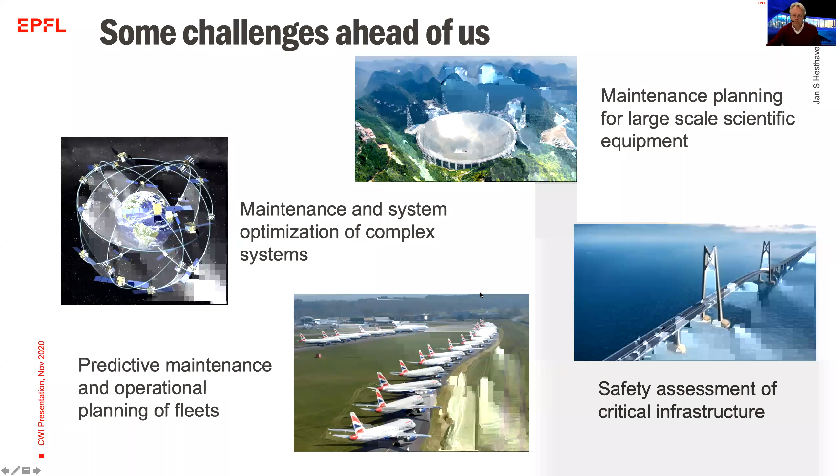So what is it that is common among these problems? What is common about these problems is that they're complex, they're multi-physics, they're multi-scale, and we cannot hope to model them directly. And even if you could model them directly, sort of ab initio, there will be a large amount of uncertainty associated with the problem, and it would be very difficult, if at all possible, to do directly. At the same time, we are going to need tools that allow us to make decisions, how to maintain, how to operate, how to optimize these machines.

And machine learning could be an idea of trying to do some of these things, but there are a number of challenges when you think about it as a machine learning exercise. Let's say you take a bridge. You want to understand whether to do maintenance on the bridge or not. You're going to have some data of the bridge, but you're not going to have a lot. It's going to be sparse either in space or time. There's going to be noise. Some of the sensors will fail. And for some assets, airplanes, for instance, or satellites, it may be very expensive or perhaps even impossible to get the data.

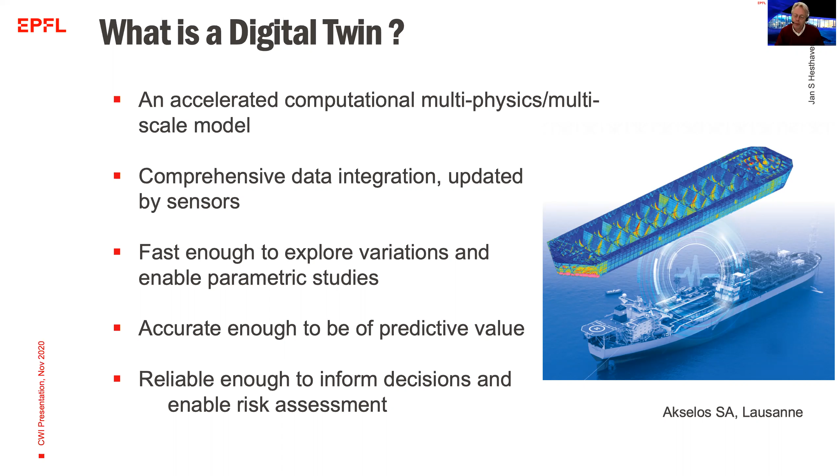But if you talk to all the big companies, the Siemens, the General Electrics, even Airbus, they all would like a digital twin, but the problem is so complicated that they don't know how to do it. They can do pieces of it, but putting the whole pipeline together is challenging.

So what is it that you need to do? Well, you need to be able to build models. You need to understand how to place sensors and integrate the data using the technology that you have. Now, once you have a model that is true to the data, you can use the model to generate data. And once you generate data, and lots of it, you can begin to use artificial intelligence to do decision support.

But because it's ultimately a small data problem, you have to go to the modeling phase. Otherwise, the AI tools simply will not have any chance of being successful. So in order to do all of this, there's significant advances needed, and we have done them in computational math, in modeling, and sensor technology, and so on. And this vision is sort of within reach.

And what I will show you today is rather than giving one talk in depth about a particular topic, I'll show you several elements of some of these issues, some of these developments that sort of point in the direction that we could hope to be able to do something like this in a not too distant future.

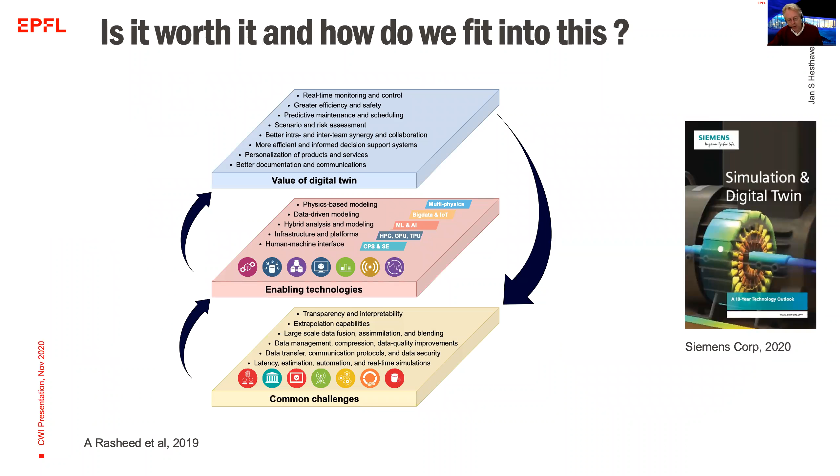So why would we do it? Well, I've already hinted at it. There was a nice figure down here in a review paper about a year ago, where the enabling technologies, that's what we all do, the computational modeling, physics-based modeling, data-driven modeling, all of this is sort of an enabling technology.

And if we can do it, then we can begin to build digital twins that can have value for risk assessment, predictive maintenance, scheduling, monitoring. There's a number of different activities that we would like to do for very complex systems. Okay, so the key is here, we're trying to do this for complex systems. And I'll show you some examples later on.

There was a report that came out from Siemens just a few months ago, all about digital twins. They have been talking about digital twins probably for 2 decades, and it's still not something that they're able to do on a big scale.

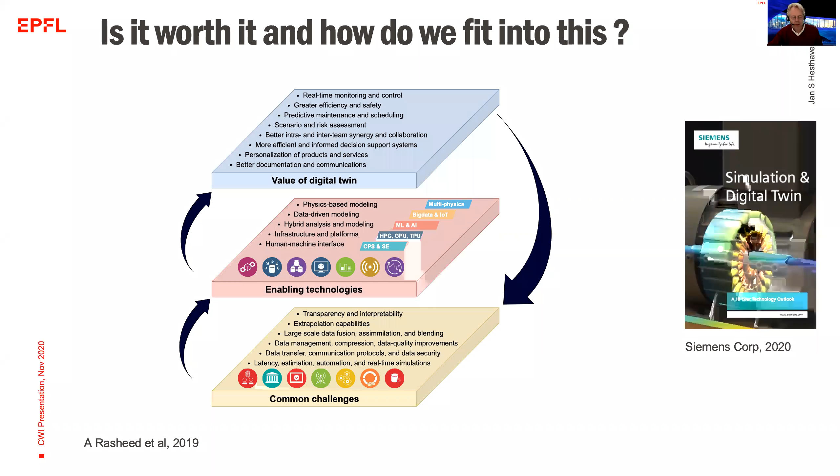Because only then can we begin to understand the dynamics of the problem, we can generate the data sets, and we can start using ideas of machine learning to make decisions. And then I will go into some examples. We'll see how far we make it. So, okay, reduced order modeling. So what's the idea of a reduced order model?

Well, what's the idea of a digital twin? We like to develop digital twins that are data informed. So in order to do that, we're going to have to have the ability to build the twin and sample it so that we can understand its behavior. It could be for uncertainty quantification. I'll show you an example for sensor placement, a number of different things, situations where we need to be able to solve the problem quickly. If every simulation is days of supercomputing time, then this becomes impossible.

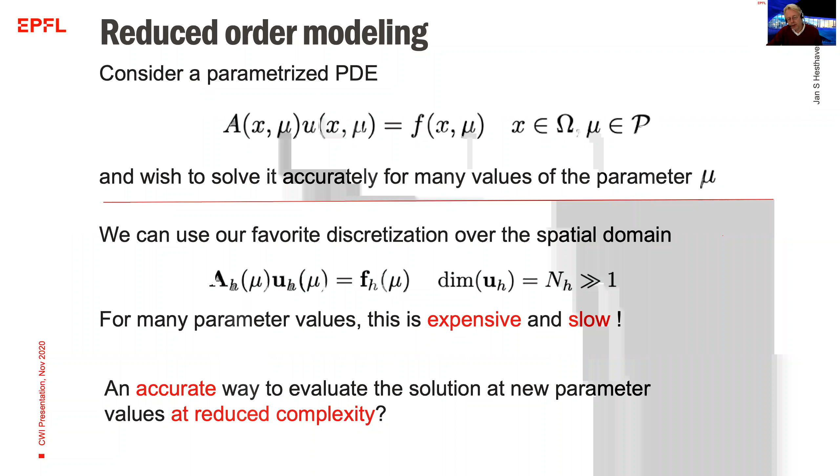Now, of course, you can use your favorite solver, finite difference, finite element, whatever you wish. If you want to do this accurately, then the number of degrees of freedom, n, is going to be very high, and therefore it's going to be slow, and you have to solve it every time you solve for a new parameter mu. So what we're looking for is an accurate way of trying to evaluate the solution at reduced complexity.

Now, let us assume, and this is an assumption that one can then check, that somehow there is another coordinate system. Instead of U, it's called Q. Q has many fewer degrees of freedom, and they're related through this matrix V, which is tall and skinny. So it has N_h rows, which is the number of degrees of freedom in the big problem, and N_r is the number of degrees of freedom in the reduced model. If N_r is much smaller than N_h, then you have a reduced model.

One way of thinking of it is I'm going to take a basis instead of my finite element basis. I'm going to choose a basis which is problem specific. If I'm willing to restrict myself like that, then in fact I can do a much better job within a certain class of problems. Now, you do a Galerkin projection, and we get a problem which, instead of being N_h by N_h, is now N_r by N_r. It's a dense problem, but it's very, very small. So instead of 10,000 by 10,000, it is now 10 by 10, which means you can now solve for every new parameter extremely fast. This is the idea of a reduced order model, basically finding a problem-specific basis.

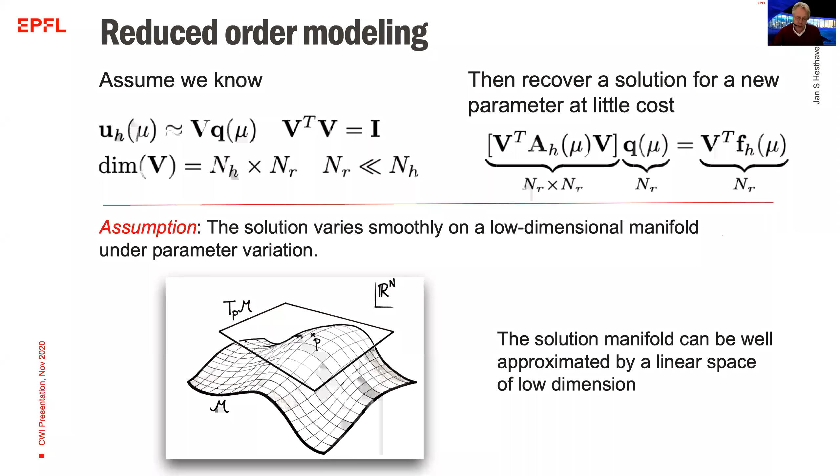Now, does this always work? Well, basically what you're assuming is that as you vary the parameter mu, the solution changes, but it changes in a smooth way, so that you can approximate the solution manifold. So this is what M is. As you change mu, the solution moves around. But you're basically making an assumption that at least in a certain region of the parameter mu, I can approximate this manifold very accurately with a linear space. Sometimes this is not, in fact, correct. But if it is, you have a good model. You can test whether this is accurate, and there are ways of dealing with that.

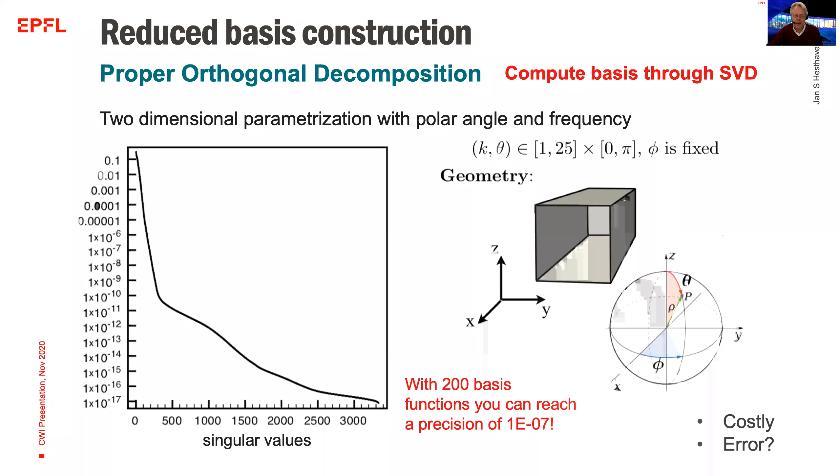Now, when does it work? Well, actually, there is an elaborate theory that allows you to certify these models so that you have a reduced order model that you can guarantee is as accurate as you need it to be compared to UH, which is the high resolution accurate solution. Okay, so we're not going to spend time on this.

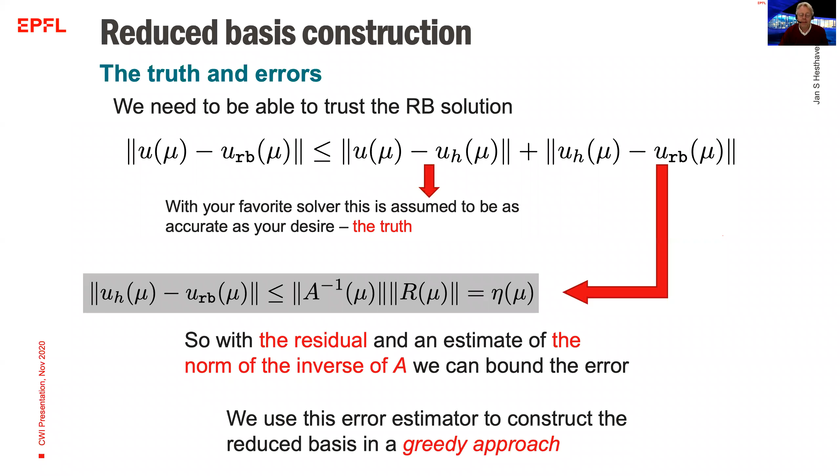It's just for you to know that there is an elaborate theory these days on how to do reduced order models for linear problems. Using this kind of technology, you have error estimates, everything is there. Okay, there's a book, you can download it for free. That's the only reason I bring it up there. That tells you and gives you an idea.

You can do it for electromagnetics, acoustics, elasticity. You can do it for Navier-Stokes, quadratic nonlinearities, and so forth. So there's a huge body of work there that allows you to solve complicated problems at very low cost. So let's see how we can use that. So the first example is I'd like to detect failures in a structure. Let's see if I can.

So the question is this: let's say I have a structure, a building, a bridge, whatever, and I'd like to know if it's failing or if it's about to fail. I don't know what type of failure it is. I cannot possibly characterize all possible failures for a bridge. So I cannot build a machine learning technology that can identify known types of failures,

because it's an impossible exercise. At the same time, the bridge has natural variations. The materials vary, they change over time, they decay maybe a little bit. Doesn't need to be a problem, but it nevertheless happens. So in a structure like that, how can you detect failures, say, using sensors? Okay, so the idea that I will present is the following.

So I'm going to build a model of the healthy structure, the one that I know. When it was built, to the best of my ability, I built a model of a healthy structure. Then I use that model to generate samples of sensor signals over natural variation. Say I allow the materials to vary, perhaps the geometries to vary, whatever. And every time I exercise my reduced order model, which I can do at low cost, I extract sensor signatures.

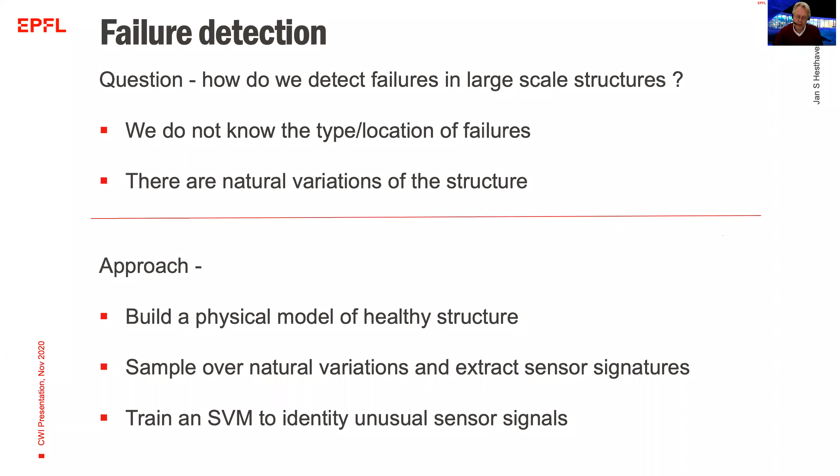And then I will use these sensor signatures with what is called a one-class SVM. I'll show it in a minute. That basically can detect outliers. Okay, so let's see how it works in a little more detail. So these are the structures that I will show. It can be more complicated ones. So it's a linear elasticity problem. You have waves that propagate around.

And the idea is I would like to put a source on the structure somewhere, as well as some sensors. And then by actively exciting the structure, I would want to know from the sensors whether something is wrong or not. I allow for uncertainty in the materials, so that the Young's modulus as well as the Poisson ratio nu can vary. But other than that, it's a linear problem.

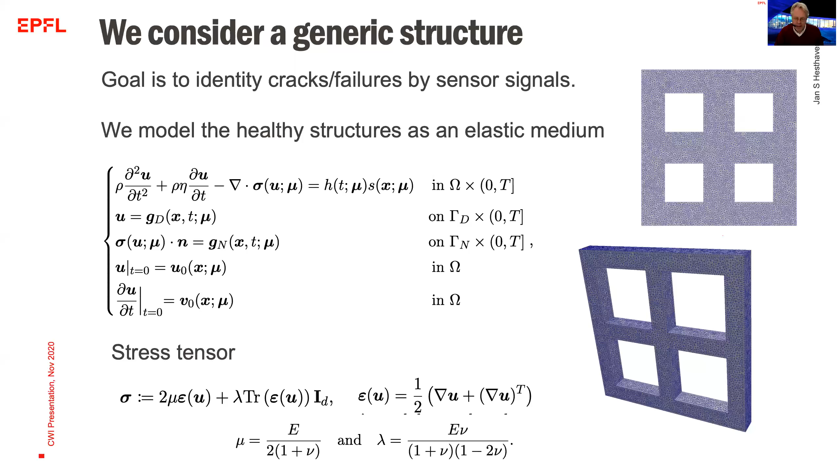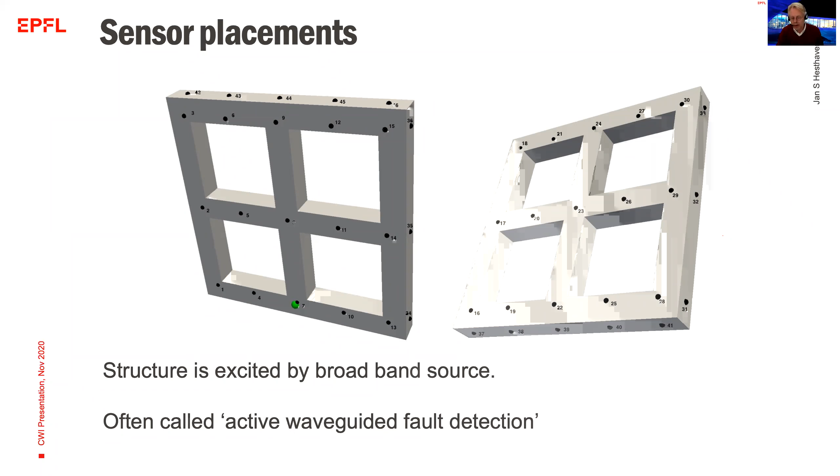So here are sensors placed on the 3D structure as an example. The structure is excited where the green dot is. It's a broadband source. Think of it as a hammer that hits it. Then you have sensors that record the signal. This is called active waveguiding. Because if you want to actually see failures far away from the source, you need to look at it as a wave problem. It cannot be a static problem. Then you can't see them.

So how does it work? Well, again, I assume the materials have natural variations. You sample over all these. This gives you a large data set that you have now created. You identify features in the time traces at the sensors that are failure sensitive. So let's say the arrival time of the first peak, the maximum amplitude of the signal, and so forth.

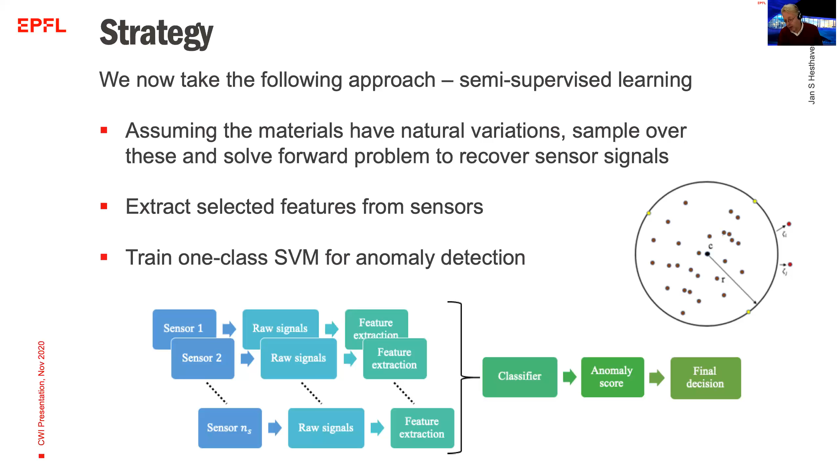And then you use that to train a one-class SVM. A one-class SVM is: you give it all the data and it tries to classify all of it as being healthy. So it creates a boundary for all the healthy data, and anything that is classified as outside of the boundary is called an outlier, and this can be scored depending on how far away you are. So you get an anomaly score, and then you can decide based on that.

Now, in fact, what we do is we do it in a two-stage process, where first we look at the signal from all the sensors. Now, if all the sensors are good, then obviously nothing is wrong. If some of the sensors are lighting up as something going on, then we would say we need to do a second stage, and then we would look at the local sensor signals.

So there are two SVMs. There's one which does the global analysis, and then there's one that does it at each sensor at a time. And with the second stage, we can then localize the failure.

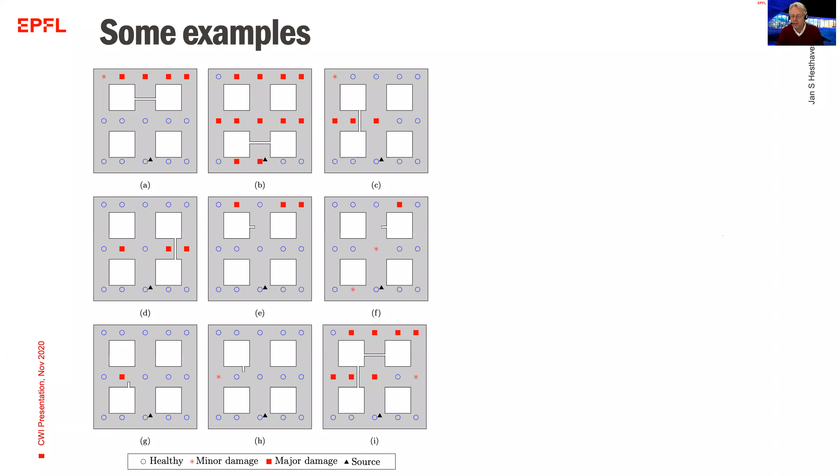Now, this is not an exact science, but it gives you a sense of where the failure could be and whether it's a large failure or a small failure. You do the same thing in 3D. Again, you have either broken beams or small cracks. And you can see that the ones that are red are the ones that light up, saying something is going on. You need to look at that part of the structure to see if there's something going on.

So this is an example of a combination where you do careful modeling using reduced order models with uncertainty quantification on top of it to build the data set that you then use to drive an SVM classifier that you then use to detect failures or not.

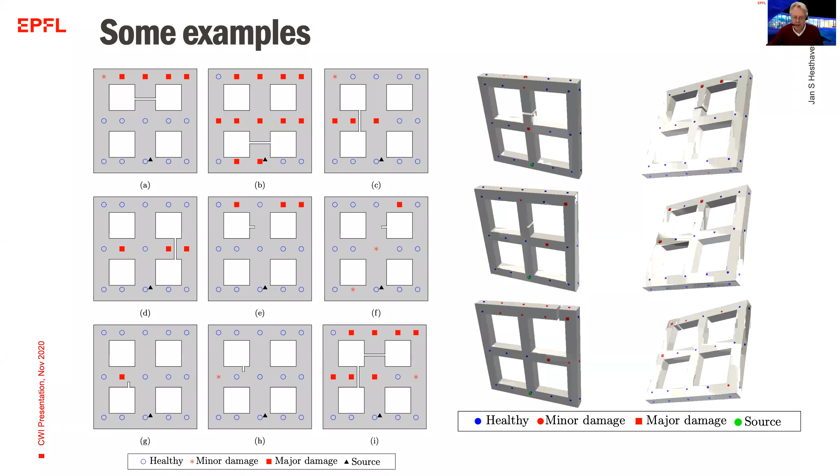Now, this was for a linear problem. If you want to do nonlinear problems, it gets more complicated. So as we just went through, here's the reduced order modeling again. You get the small problem on the right-hand side, everything is fine. But if it's a nonlinear problem, then the problem is that A, your operator, depends on the solution. So therefore, you would have to evaluate it every time. And then you lose the benefit of the whole method.

So you can play some games, there are various ways around that, but if A is a general operator, this becomes very complicated. So what I'm proposing here is actually to build a reduced order model using machine learning as a surrogate model. And then once you have the reduced order model, you can go and do the exercises that I just talked about using building data sets.

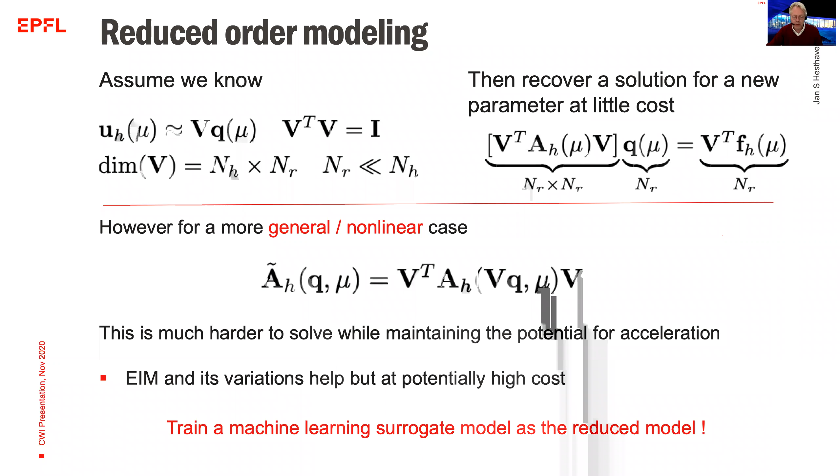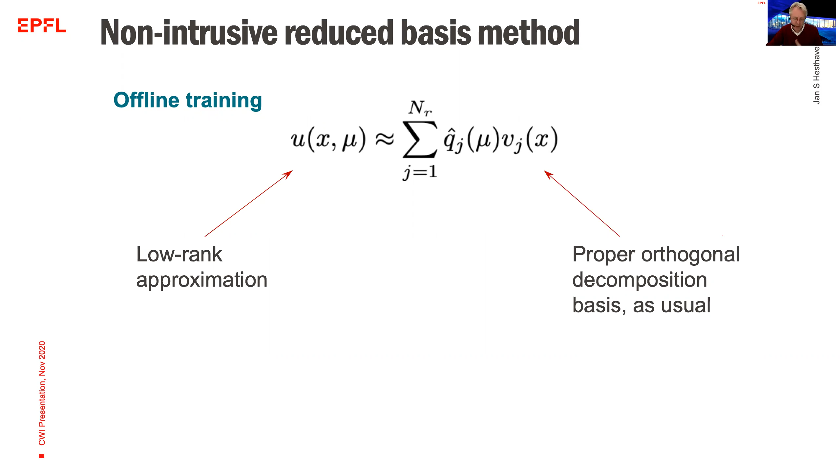So how does that work? Well, this means now that we will again represent our solution U as a function of two. There's a spatial variation and there's parameter variation. The spatial variation is exactly as before. This is the eigenvectors, what I call V. And instead of solving a small problem in order to find these Qs, I will train a machine learning process. In this case, we will use Gaussian process regression.

You can also use neural networks. We have done that. It also works. But the neural net is sort of the last stage. If nothing else works, you can do the neural net. The Gaussian process, if it works, is much faster and much simpler. And then once you're done, you have created a surrogate for the coefficients, and you never solve the problem again.

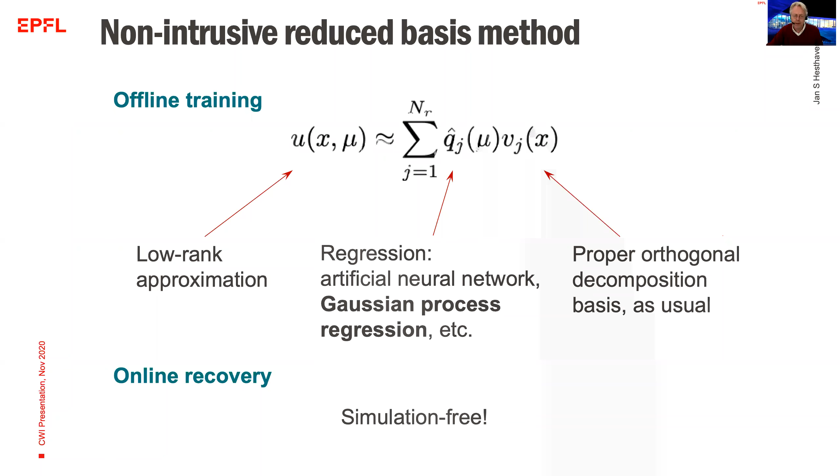So in this case, we use Gaussian process. It's not so important what that is. Think of it as you're trying to represent a function with kernels, so it's a little bit like radial basis function methods. Okay, so you don't have any grid or anything.

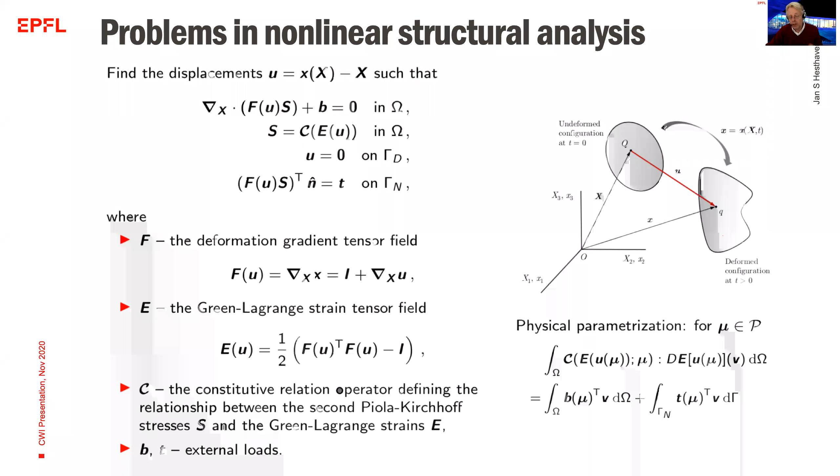So now we'll do nonlinear structures, but it'll still be structures. If you're not familiar with it, it's not so important. But it's a nonlinear problem. And this one is a classic problem that people have looked at, and this is called the Lee frame. So there are two parameters, mu1, mu2. And the material is a nonlinear material. And then what happens is you apply a force, F, to it.

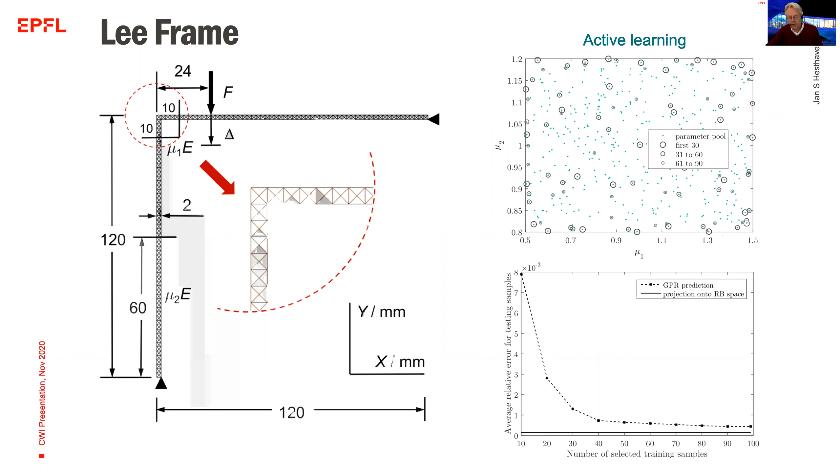And the frame on the upper left, as you push this Lee frame, it distorts in very serious ways, and then ultimately flips back. So this is actually a surprisingly difficult problem to do, but with this technique you can do it.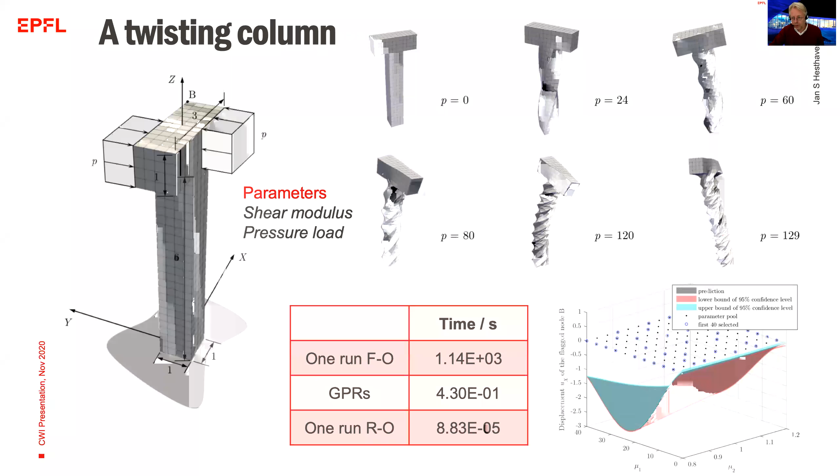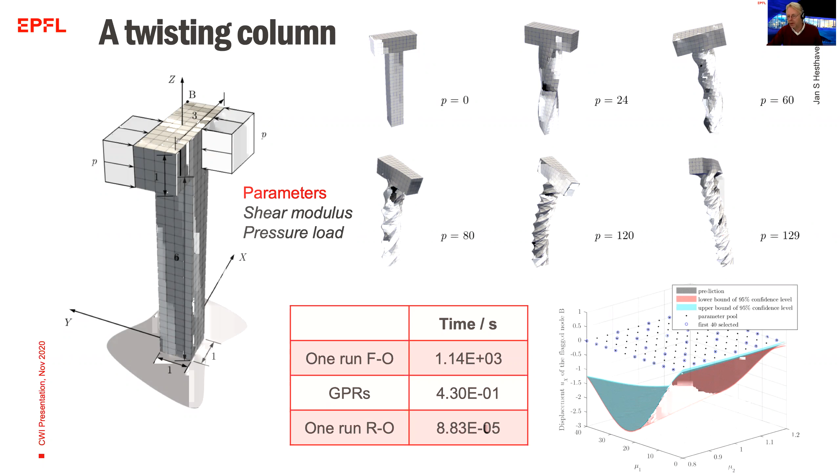So once you can do that, you can start doing nonlinear large structural problems, and then you can do uncertainty quantification and so on. All these things are only possible if you can solve the problem fast enough. If every time you have to sample, it takes basically 20 minutes to solve the problem for one parameter value, and you have 10,000 parameter values, there's just no hope. So it starts with the reduced model.

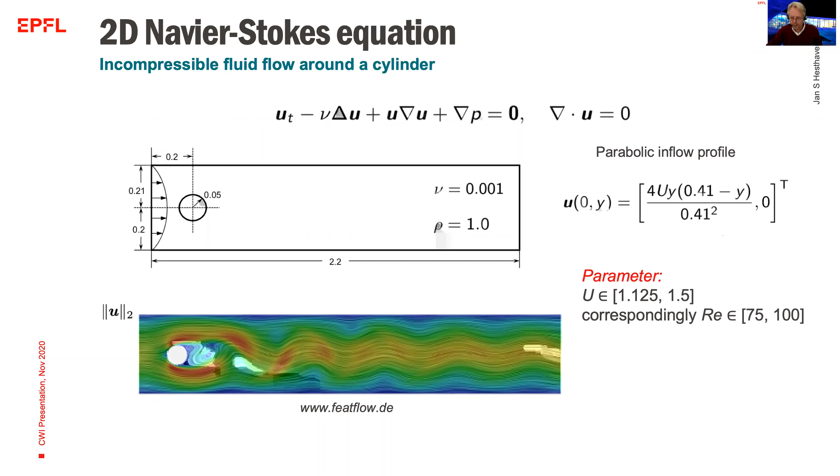You can also do fluid mechanics if you wish. So here, incompressible Navier-Stokes. It's exactly the same way. You build a model. Now you have time also as a parameter. The Reynolds number, of course, is relatively low, but you can see that you capture the shedding behind the cylinder very well, and at orders of magnitude higher speed.

Now, of course, you cannot take this model and say, oh, I changed my mind, I would like it to be a square instead of a round cylinder. Then you're going to have to start again. And this is how you gain the speed.

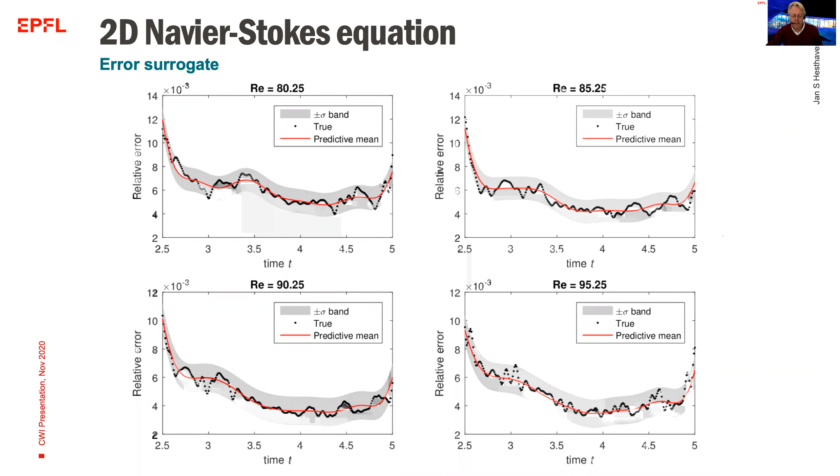Sensor placement. Maybe that'll be the last example. So here's the question. In fact, there are 2 questions. I have a structure, I'd like to put sensors on it. I only have a finite number of sensors because they all take energy. So I have a certain number of sensors I can put on, and I cannot afford more than that. So the question is, where should I put them? If I want to learn as much about the structure as I can, and I have 10 sensors, where should I put them?

Or the other question, which is equally interesting: let's imagine people have placed the sensors for me. 10 sensors have been placed. What can I actually hope to see? Very often you talk to people who have put sensors, let's say, on an oil rig, and the sensors are here, but they would like to know exactly what happens at the bottom of the sea. Now, is this even realistic? Is that possible? So these are complementary questions that are very, very much related.

So we need to make a couple of things here. We have to decide what it is that we want to measure. Now, it makes sense to measure something that suggests that there's a failure or not. We have already discussed arrival times, maximum height of the waves. We actually have 18 features that we look at.

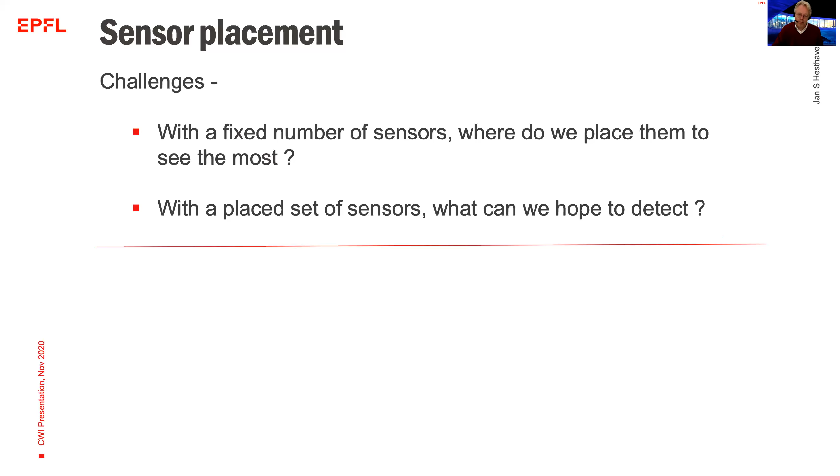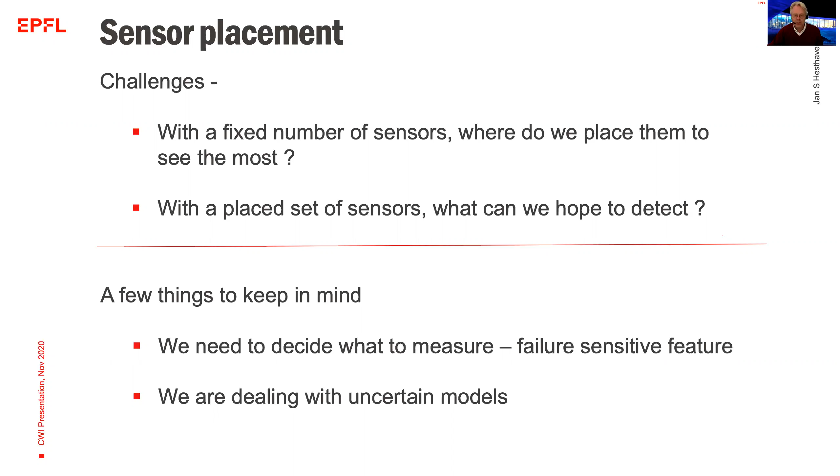And then at the same time, when we are placing sensors, we have to also accept that we're placing sensors in a scenario where there's uncertainty, there's natural uncertainty. So this is not going to be an exact science where these sensors should be placed, but rather taking into account the uncertainty. So again, we use, in this case, sparse Gaussian process, but it's a detail for now. Use a variant of Gaussian processes.

And then basically it's an iterative process where first you place the Gaussian, you pick the locations, you find the hyperparameters, you ask yourself, what is the maximum variance over your domain? You move the sensors to where that happens, and then you iterate like that. And then you do that for many, many different samples of the parameters in order to take into account the uncertainty. You only have to do it once for a structure, so it's not a big deal.

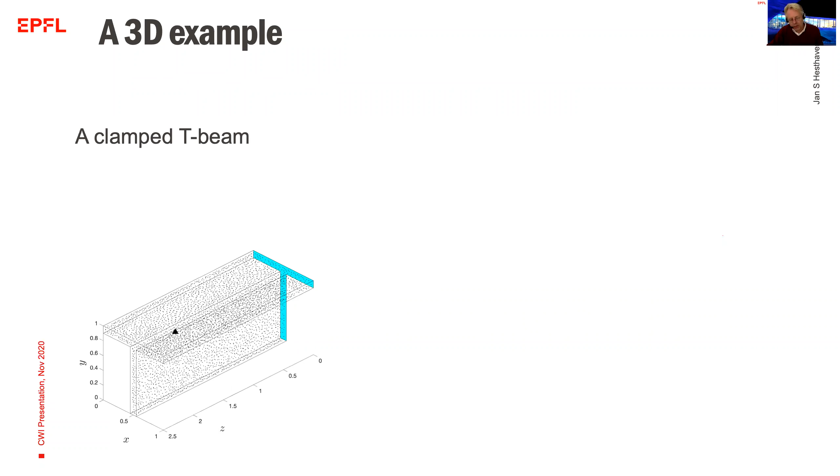Here's an example. It's a T-beam. It's clamped at the end. It's free at the left. And we want to know, as you impose a force on it, where should I put the sensors, knowing well that it's an uncertain material.

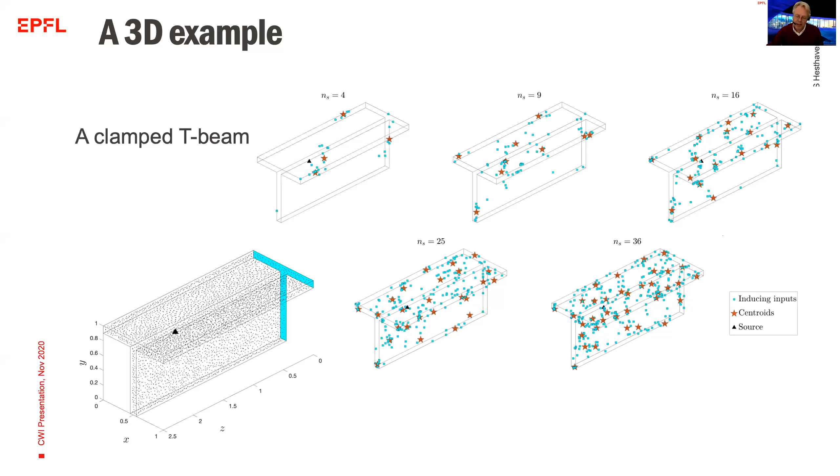So here's the result. So if you can only put 4 sensors, then these are the locations. And what you see is that the little blue dots is the result of the sensor placement varying while I take into account the uncertainty. And then for each of these clusters, you compute a mean. And this is the location. Okay, so this is 4 sensors, 9 sensors. It goes up to 36 sensors. And you can see that basically it takes into account the natural uncertainty by placing it in the mean of where the algorithm predicts.

And what this shows you is the variance reduction. So if you only have 4 sensors, it tells you that right where the sensors are, the colors are red, the error is relatively small. Well, no. So the blue means you have high variance, and the red means you have low variance. So this means where it's blue, you have a hard time measuring it with 4 sensors. But as you add more and more sensors, if you add them carefully, you can see that eventually you're reducing globally the variance in your prediction, which means with those 36 sensors, I can measure anything that goes on in my structure to within a certain accuracy.

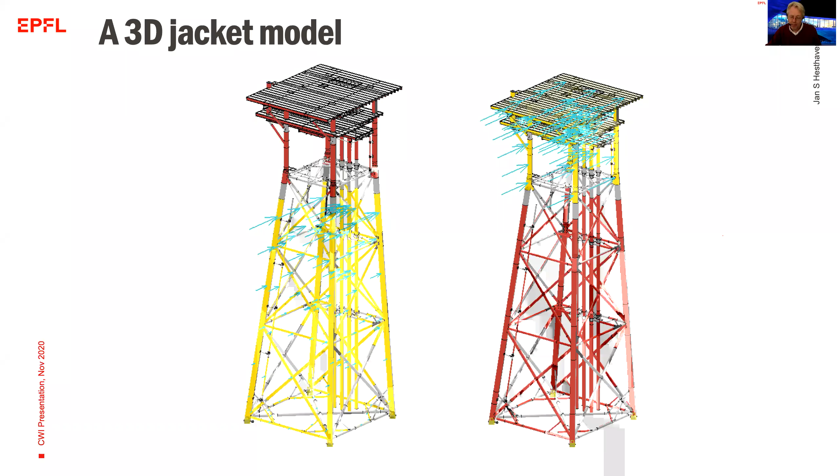That's the idea. Okay. Now, just to show you an example of a real structure, so this is called a jacket. So this is what sits underneath an oil rig. And there can be forces on it to the left. It is the forces from the ocean actually hitting the structure. The colors give you a sense of the forces on the structure. To the right is wind forcing. It is clamped at the bottom, and in fact, at the bottom, they can be nonlinear, but that's not so important. And if you go through this exercise and you ask yourself, well, if I want to predict behavior for this jacket, where should I put the sensors? And the algorithm says here.

And then the table on the right, the details are not so important, but these are basically 4 different cases of failures. You know, you break a beam or you do something to the structure. What is the chance that you detect it? And you can see that cases 1 to 4 get increasingly bad. So if a beam is broken, then all 10 sensors tell you there's something wrong. If it's just a minor thing, like in case 2, well, you still get 75 to 90% reliability over variations as long as you place the sensors correctly.

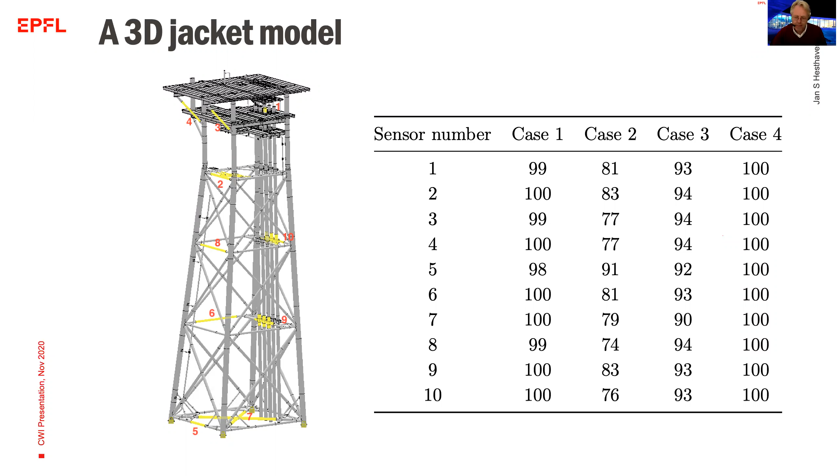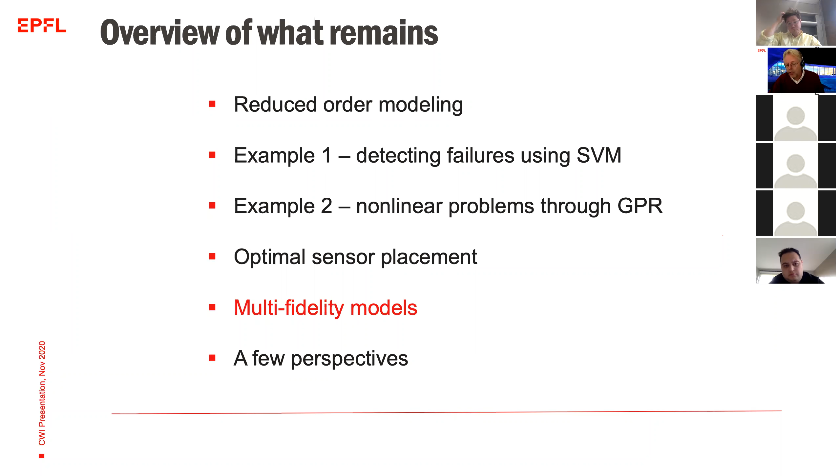So multi-fidelity, I'll skip this, but the idea is once you can place sensors, you have access to Mother Nature, and Mother Nature can give you the right solutions. So now you have a situation where you have some data which is very high quality, it's the sensor data, and then you have a lot of data which is computational data, which is not quite as accurate. And the question is, can you combine the two so that you can get much better predictions than with the computational model itself by using the little data you have from the sensors? And because you have placed the sensors carefully, this can be hugely beneficial. But I won't talk about that just in the interest of time.

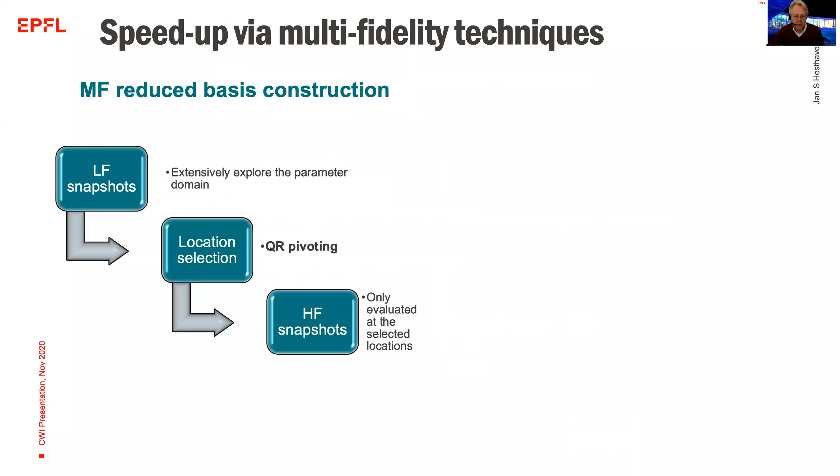Okay, so just to finish on time here. So the point I'm making is that in order to do digital twins, and in order to use artificial intelligence to build and drive digital twins, we have to be able to build reduced order models of complex assets. Now, everything I have talked about is single physics problems. Multi-physics problems is more complicated. It's an area of research.

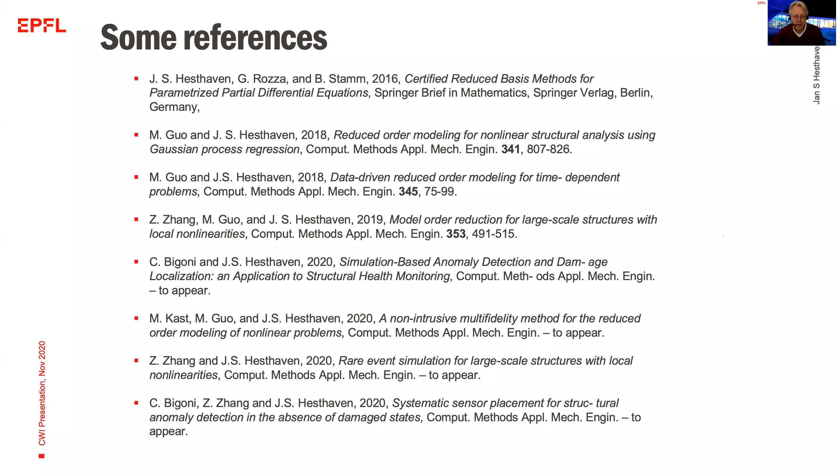So this is an extremely rich area. There's a lot of things to do. I have only scratched the surface. It's interdisciplinary, it's challenging. But if you can get it to work, it can have a huge impact in the next industrial revolution. Here are some papers for those of you who are interested in that. Everything I've shown is just a few years old, and it's really just the beginning of things. So with that, thank you very much for your attention.

Thank you. That was really great. A really nice talk. Thank you. I see we have one question. I'll just read it out loud.

Is the research work based on in-house software where all the high quality discretization and solvers are incorporated, or is it partly based on commercial software? And is it all in Python? Honestly, I don't care which language it's in. Okay, for all I care, you can write your own language. That's completely uninteresting to me which language it's written in. So it's a mix of things. I mean, most of the software is actually open source software that we have not developed, but we simply take and use.

The example I showed with the nonlinear case. So now it becomes what is called non-intrusive, which means I don't need to know the solver. I just need to say, if I give you the parameter, I give you the materials, whatever, you give me a solution. That's all I need. How you get it, I don't care about that. Okay, so this can be a commercial solver, it can be an in-house, it can be a classified solver, it can be anything you want.

Now, the case where we go to these very complicated, like the oil rig, that's actually a piece of software that is developed by a company at EPFL. I'm not part of it, but I work with them. The technology is published in the open literature, but coding it up is a bit of a nightmare. But the key point is this: you don't have to have access to the inside of the code. You can do non-intrusive reduced order models at this point in time, and once you have that with the Gaussian process or whatever, you can do everything that I showed you. So it can be written in Algol, and you can still do it.